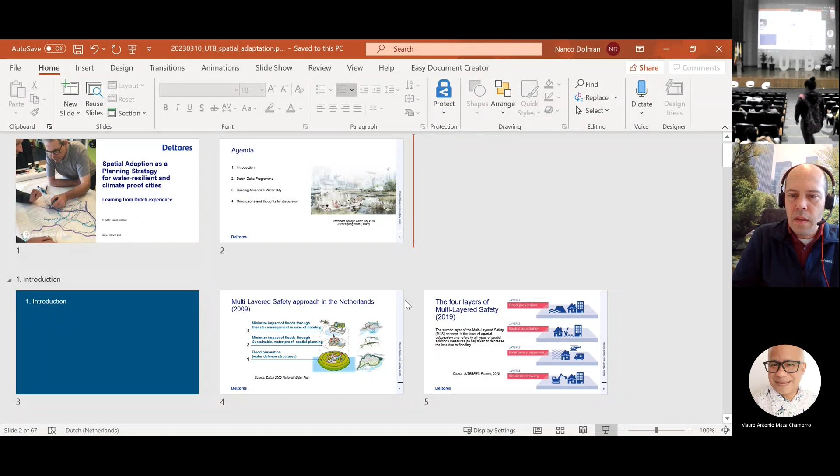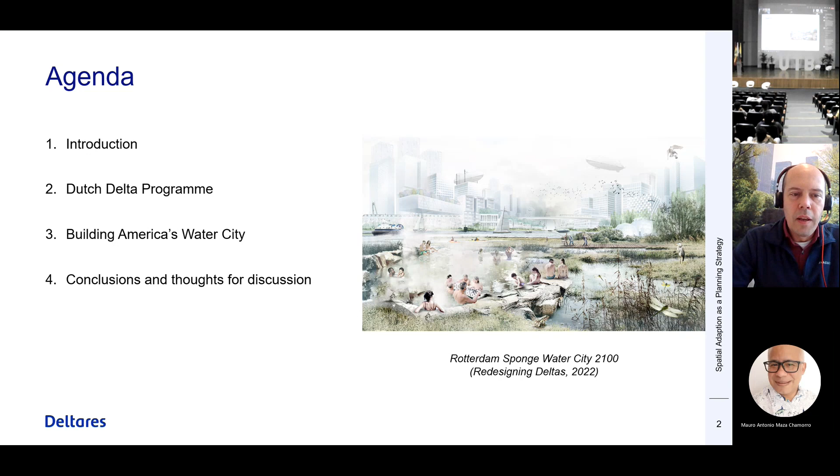Thank you very much. I will share my screen. So for my presentation, I brought a selection of slides with this agenda. I will start with an introduction or context, then share some experience from the Netherlands, especially the Dutch Delta program. Then some case studies from the USA, one in New Orleans, one in New York. And then I will close off with some conclusions and thoughts for discussion.

To start with the introduction, in the Netherlands we have a tradition in flood defenses, building dikes. A large part of our country is below sea level. And we have had to re-evaluate this flood protection because we cannot continue with only having dikes, regarding climate change, sea level rise, but also extreme weather events.

So in 2009, the multi-layered safety approach was introduced. Besides flood prevention, that also includes spatial adaptation in the second layer behind the dikes. So that is having resilient cities, but also our land use. We have to decide on that which fits coping with extreme weather events, but also will foster livability. And then eventually it is also about dealing with calamities and responses to disasters.

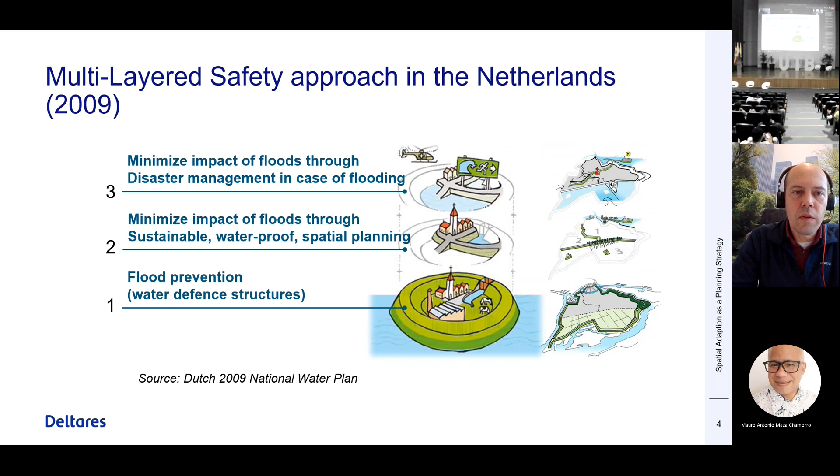More recently, a fourth layer was added, and besides being adaptive, which is rather reactive, it is also about being transformative, more proactive. And that is a little bit following the Sendai framework for disaster risk reduction - so building back better in response to disasters.

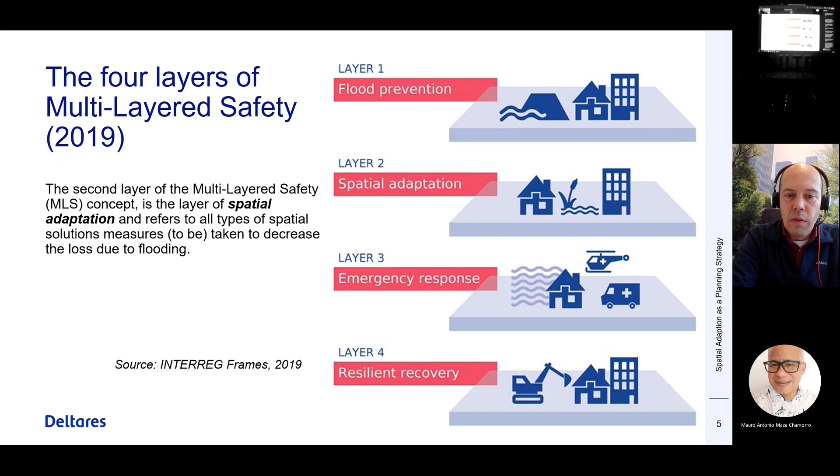What it is also about is living with water. And in a few weeks, the United Nations will organize a world conference on water, and it's really about living with water. It is not only fighting the water, but also the water is bringing life and economic development, so we have to embrace it as well. We can actually benefit from it, like an ecosystem service.

Over almost 25 years ago, we introduced the living with water principles, and that's both quantitative, in retention - delaying the water and only draining or discharging it when necessary - but it's also about water quality, in preventing pollution, then making it in different qualities, and then eventually it also is about water treatment.

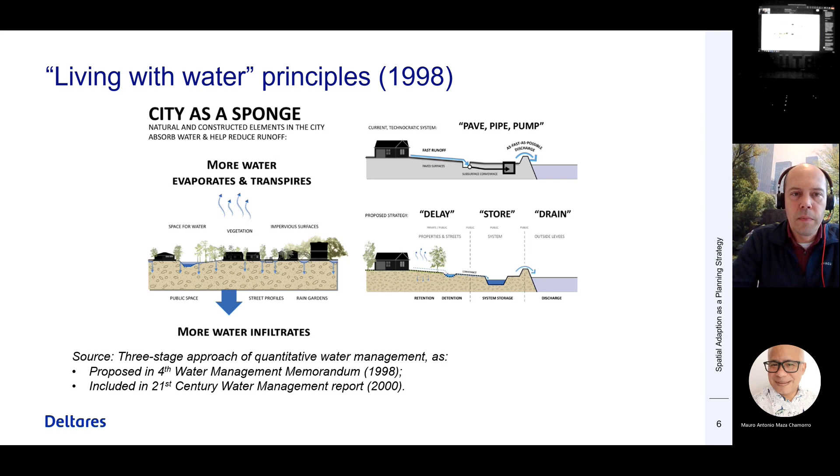Interesting, it is also not only engineering, but it is also about planning, especially when looking at cities and deltas - urbanized deltas. We call that delta urbanism. And designers really like to introduce or analyze the landscape in what we call layers. In those layers, we have the substratum, that's the subsurface. We have networks like drainage, but also roads, rail, canals, rivers. And we have the occupation, the land use.

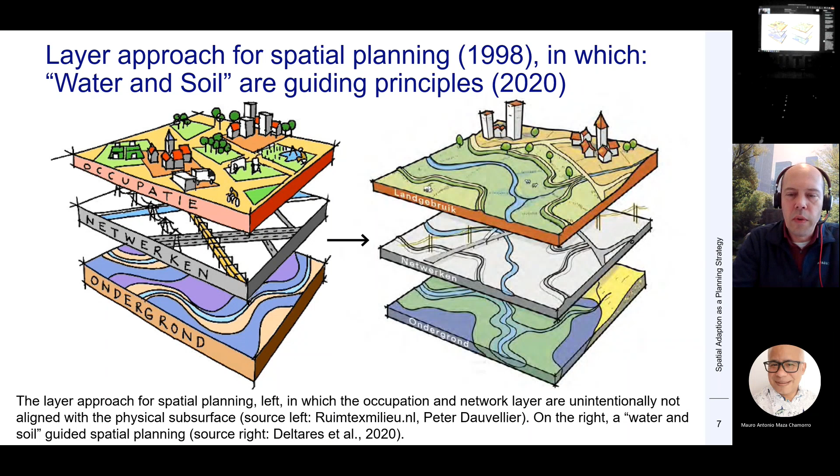And what we see is that water in different sorts, but also the soil, is in all those layers. So you could consider those as guiding principles, what we call them. We can actually integrate that when looking at water and climate change, and then integrate it in a multifunctional strategy. This was actually the design we made for Hoboken, the waterfront at the Hudson River in New York.

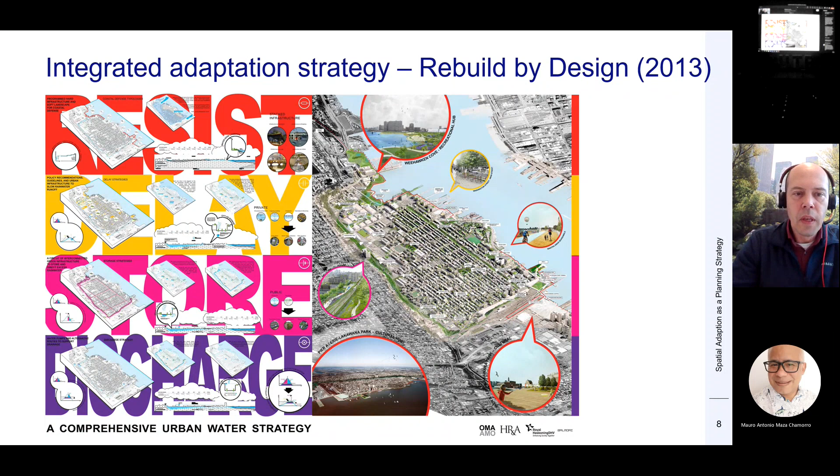The Dutch Delta program actually started in response to a big national flood event. Almost 2,000 people died in 1953, and it was called the Delta Works, which was really about making shorter lines of defense, flood defenses with barriers and dikes, building the threshold. Then at the end of the 20th century, there were several years of river flooding, fluvial flooding, and then the program Room for the River was introduced. We called that the second Delta Works.

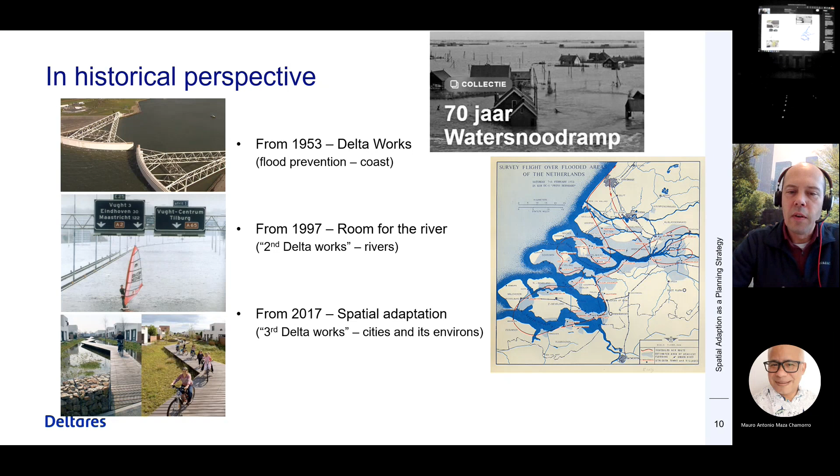And more recently, spatial adaptation was introduced, like a sort of third Delta Works, more focusing on cities and its environments. The spatial adaptation is a Delta plan within the Delta program. So the program is, let's say, like the policy or the national government policy.

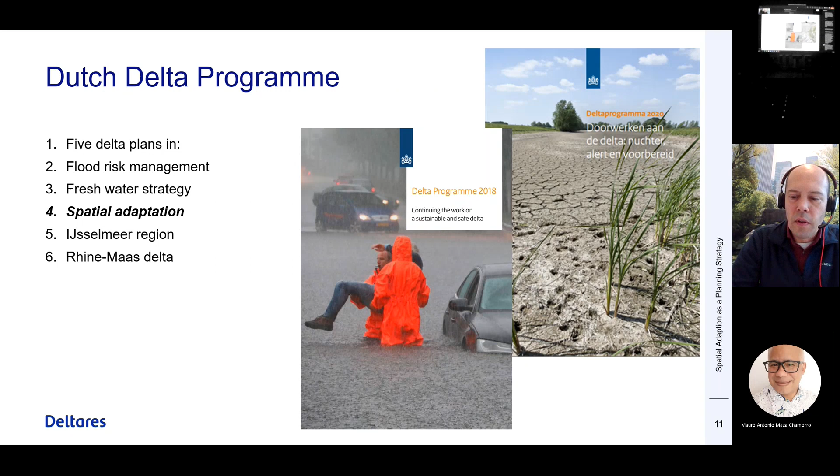And the plan is more the execution of how regional and local institutions will implement it. And of course, also the Netherlands is experiencing climate change. So, because we are partly below sea level, we have very much focus on sea level rise, but also we have experience in increase of precipitation intensity, river discharge, but also dry periods and heat stress.

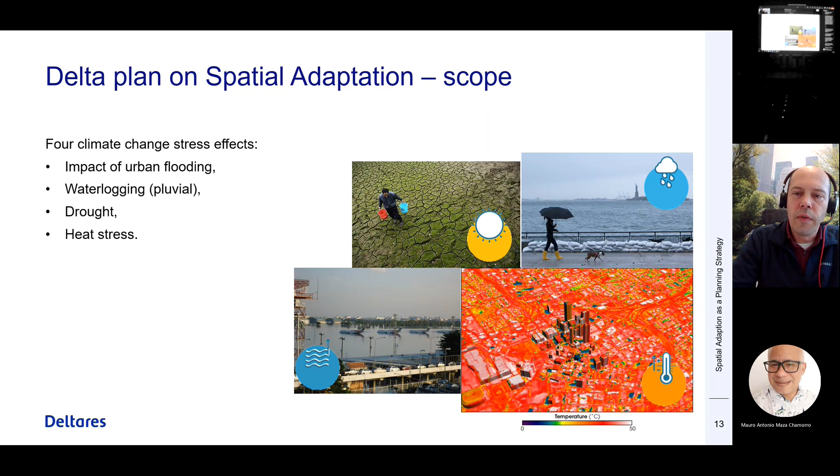And these are also the climate stressors where spatial adaptation is focusing on. So it is about impact of urban flooding, also because of high water levels in rivers, but also along the coast. It's about pluvial, so rain intensity. It's about drought, longer periods of water deficit, and heat stress.

And it follows a triple A approach, what we use within the spatial adaptation process with stakeholders. So first, we want to understand the system, both the water system and the landscape. We call that the analysis. And it's both the vulnerabilities, but also opportunities. So where are synergies to be found? And in the second stage, it is about ambition. It's developing a strategy for a city or a region.

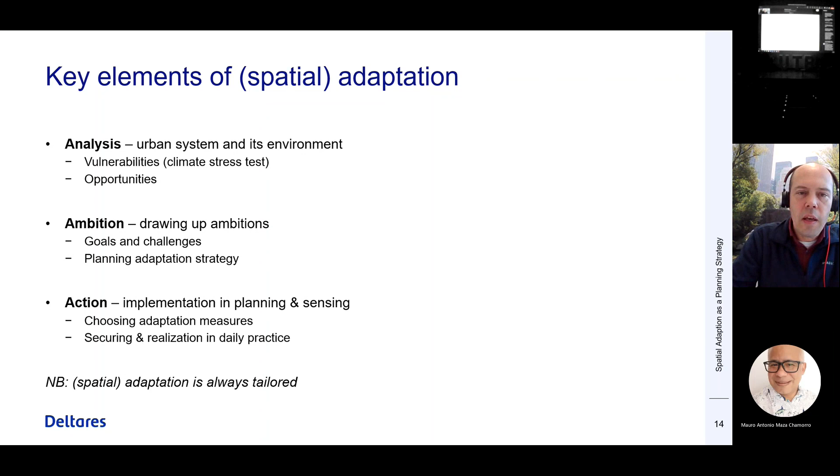And then it's about making that strategy implementable, but also bankable in the sense of financing. And implementable, of course, going to having a selection of actions. And this is always tailored, of course. So this is just a more, let's say, governance approach. And tailored for the Netherlands, we introduced some ambitions, but also goals for the Netherlands.

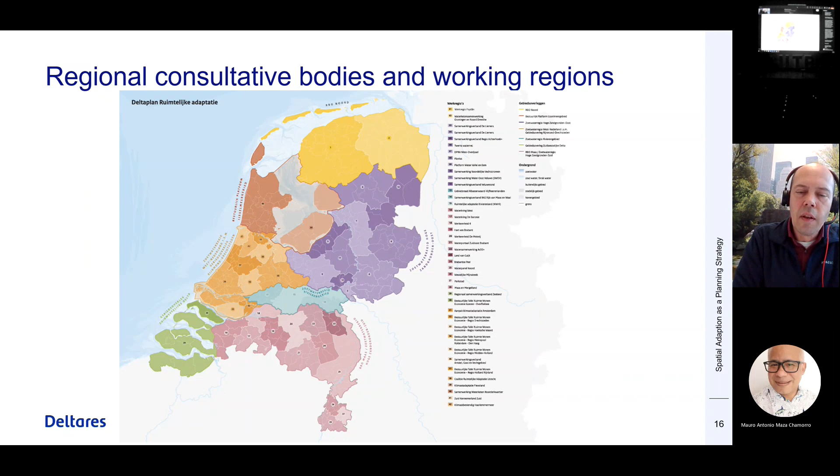So one is that we expect from all stakeholders that they will embed climate-proof and water-resilient action in their policies and behavior. And then we have to work on a transition to a climate-proof and water-resilient spatial design by 2050. And to organize that, the Netherlands is divided in regions, consultative bodies and working regions that will pick up or implement those actions. And of course, it comes with a planning.

Now and then we evaluate where we are, and we are also experiencing that the implementation is slow, and at the same time climate change doesn't wait and is accelerating. So in a way it feels a little bit that we are behind.

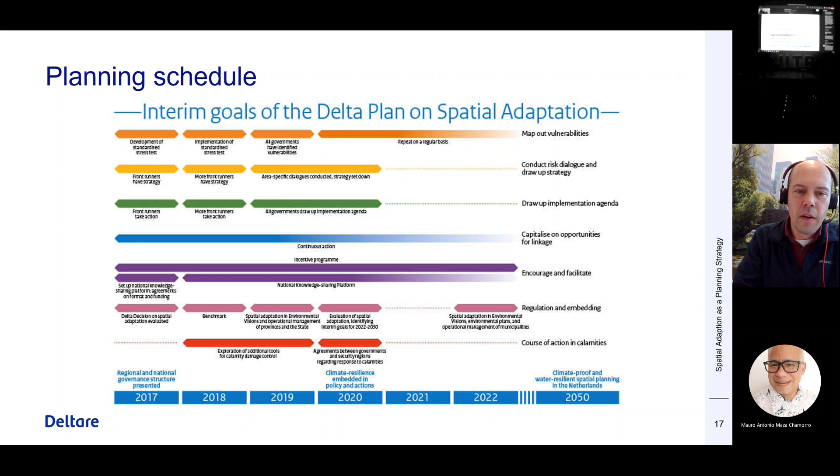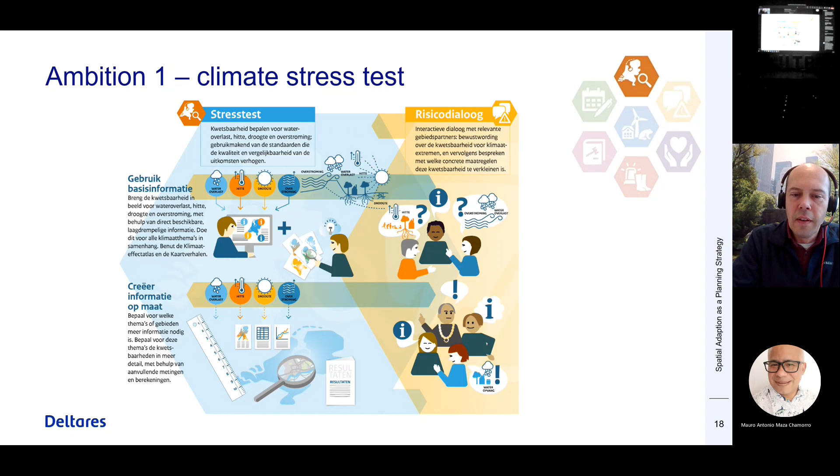To support all this process, we are developing instruments, like for the first ambition, the analysis, understanding the system. We developed a climate stress test, so you can actually map rainfall intensities and floodings. You can see drought stress, etc. And this is an example of those maps. So you have the waterlogging in cities, but also the urban flooding when a dike breach is happening.

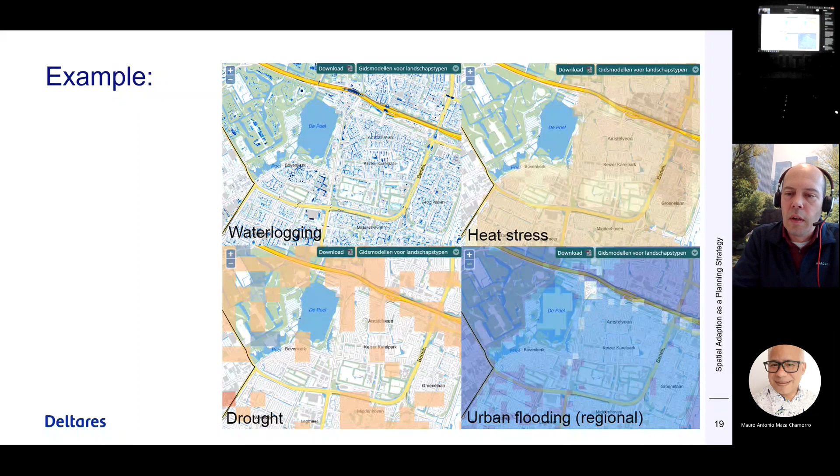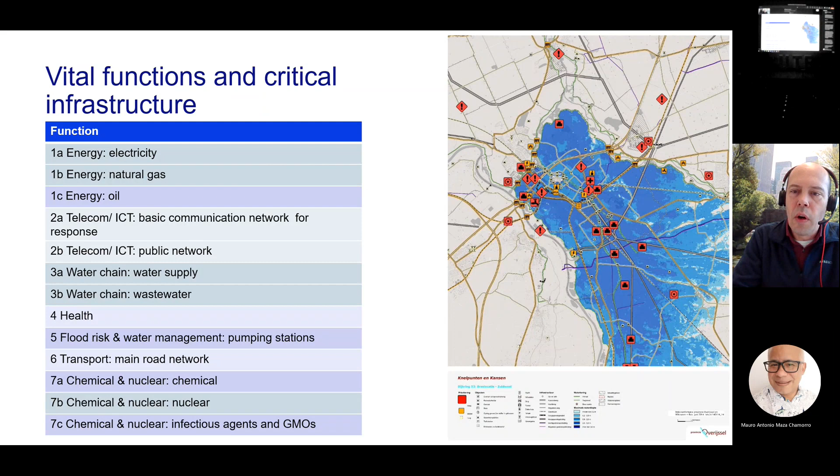It is also about understanding the vital and critical functions in infrastructure, like communication, energy. It is about roads and connectivity. It is also about the multi-stakeholder process and to have a dialogue on this. And interestingly, this is also what we used in New Orleans in the USA. That was called the Dutch Dialogues, to talk with all the stakeholders, but then in a structured way.

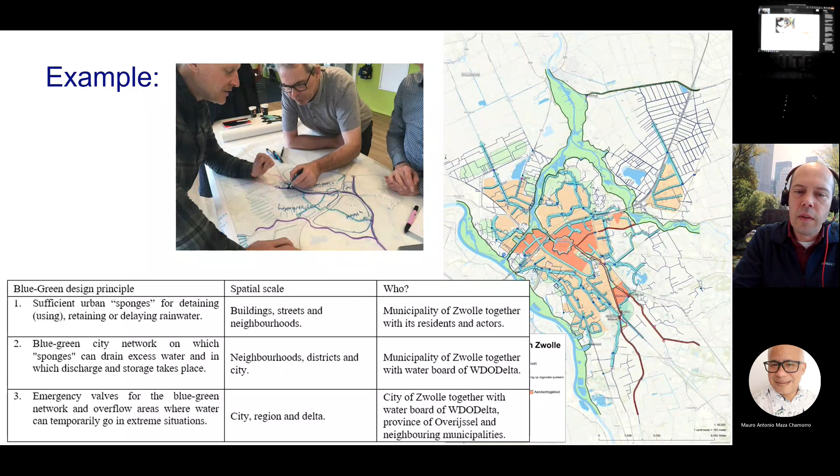And of course, developing that strategy and then finding this common ground to have, let's say, a co-owned strategy. And this is an example from the city of Zwolle in the Netherlands, where we reckoned that there are three spatial scales. So we have the neighborhood scale, a city-wide scale, and a region scale. And for each of those scales, you have to organize with different stakeholders and also with different interests.

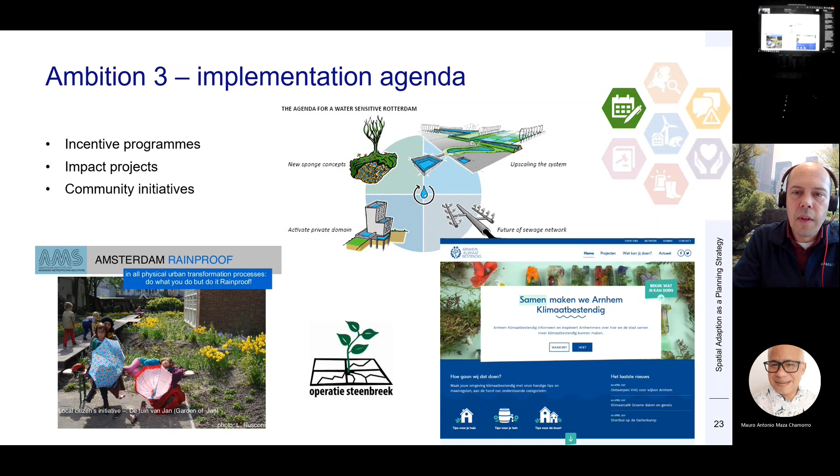And then, of course, it is about implementation. And currently, we still are in the phase of having impact projects or demonstration projects. It's about community initiatives, because a large part of cities is privately owned. It's about startup organized incentive programs.

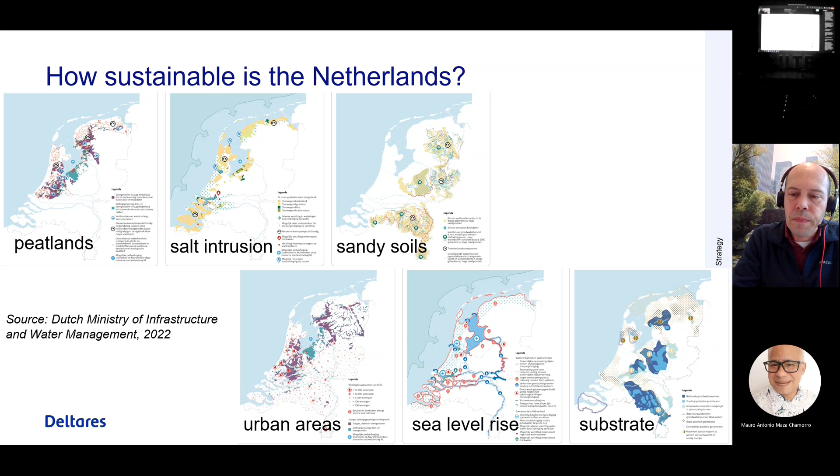And we are working on these futuristic visions in 100 years. So what will the Netherlands look like in 2120, for instance? Does the Netherlands retreat, and then we will live on the higher areas, maybe even in the neighboring countries like Belgium or Germany? Or do we move towards the sea and build new islands or new dunes?

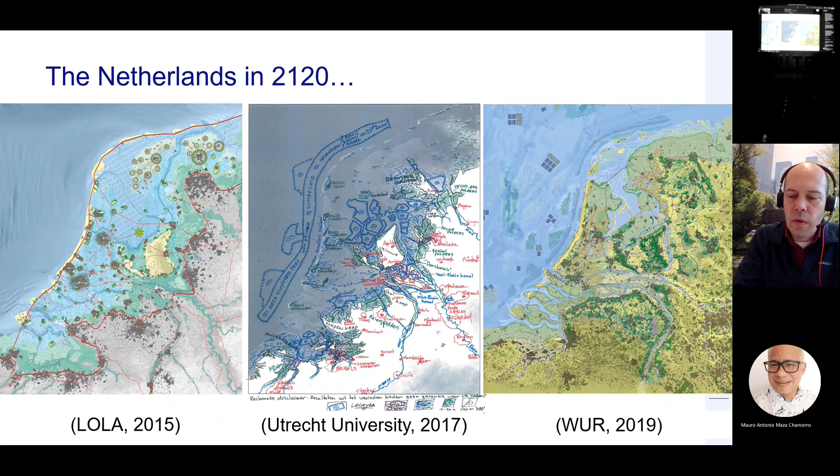Or will we remain and continue strengthening the dikes, but then maybe embrace more or give more room for green and blue solutions? Within this background,

I have worked in the USA, and it was mostly in response to catastrophic disasters like hurricanes. New Orleans was hit by Hurricane Katrina in 2005 and was followed by what we call the Dutch Dialogues, because at that moment the first reaction was to build back all the flood defenses and introduce new barriers, but there was no attention at all to the city itself within the interior of the flood defense.

So we worked on what we called the Greater New Orleans Water Management Strategy that was actually awarded a National Planning Excellence Award. And then in 2012, the area around New York and New Jersey was hit by the storm and Hurricane Sandy that initiated the Rebuild by Design competition.

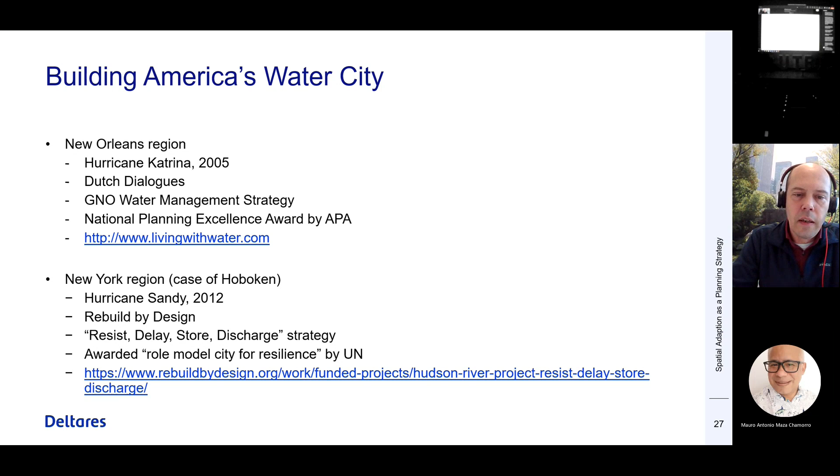It was a competition, but it started as a sort of multi or transdisciplinary way of working, what we already did in New Orleans, but then more formal. And I was in the team for Hoboken to work on the resist, delay, store, discharge strategy. And it was also awarded by the United Nations for a role model city strategy. And this was actually the sort of initiative that eventually evolved to what we now know as Water as Leverage. It also started in Cartagena at this moment.

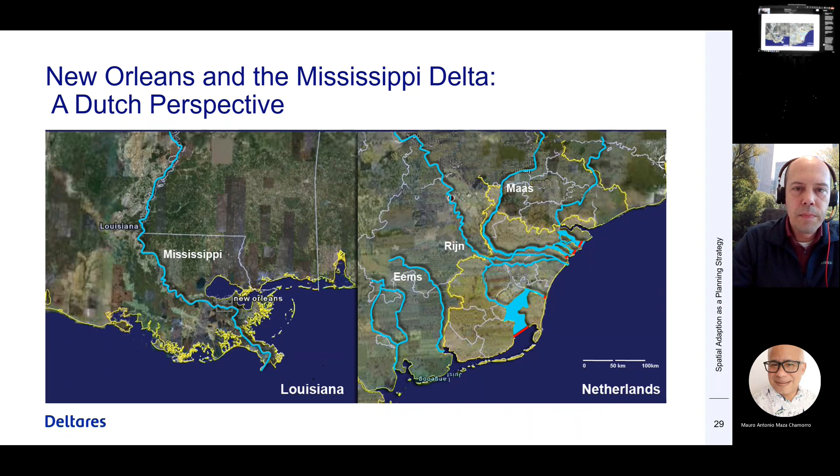There was a whole coalition, many institutions like education, research, practitioners, engineers, both in the US and the Netherlands, working together in developing this water management strategy. At that time, I was with Royal Haskoning, still without DHV.

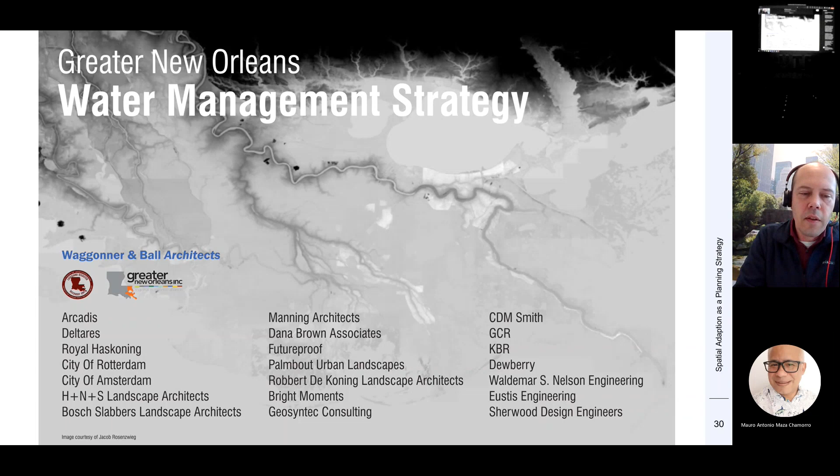And interesting is that we looked first, of course, at how Katrina really illustrated the vulnerability of a delta city in New Orleans, and that the protection system, the dikes and the levees, was designed to cope with a 100-year storm. And that was already done or underway. So our focus within the water management strategy was more to deal with subsidence, with extreme rainfall, making better places, livelihood, like blue-green in the city, and eventually make that a more livable city, also for the next 100 years or beyond.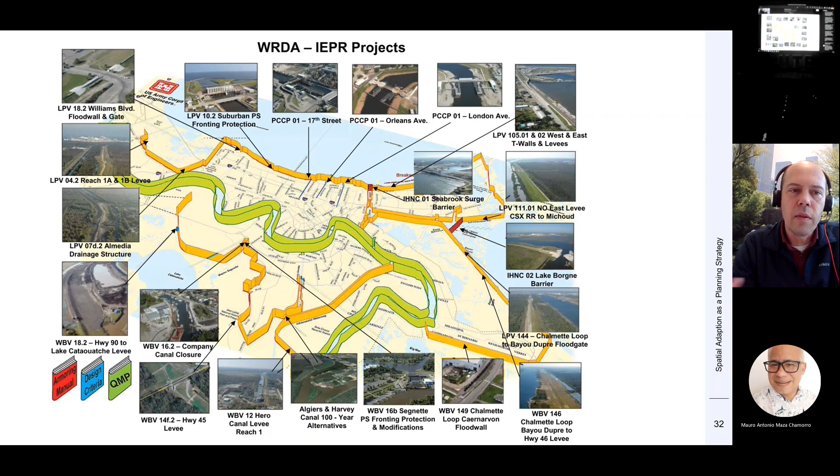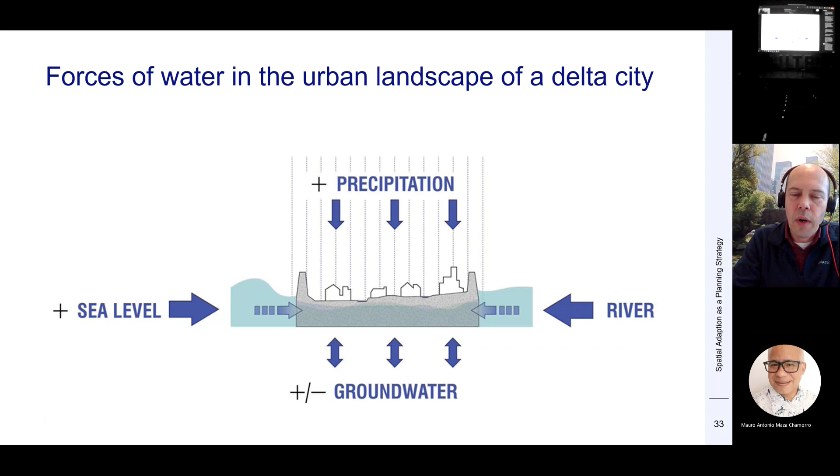And we looked at the city more. Okay, the water is coming from different sides. We have the sea because of the Gulf of Mexico. We have the river, the Mississippi. We have precipitation from the sky, and we have the soil and groundwater from below. And this is the daily practice. So it is not only hurricanes. On a yearly basis, extreme rainfall is happening in New Orleans, especially during the wet season.

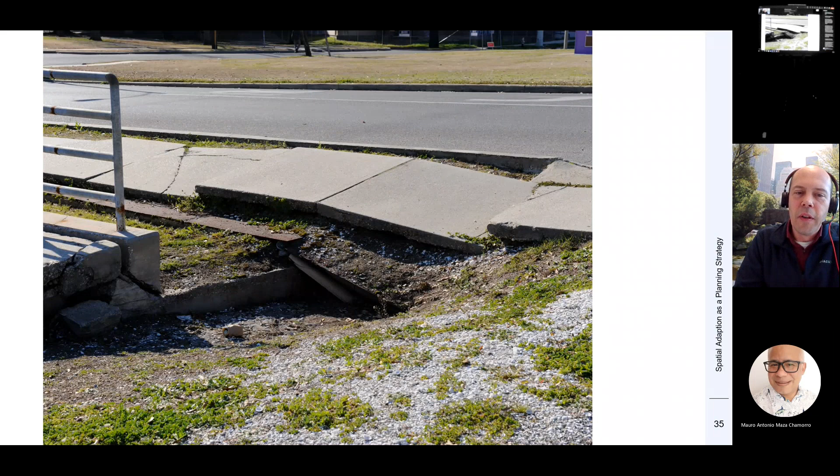This is also happening during the dry season, because the water management was very much focused on discharging the water. So there's no water left to keep the soil moist and wet, and to avoid damage to constructions during subsidence.

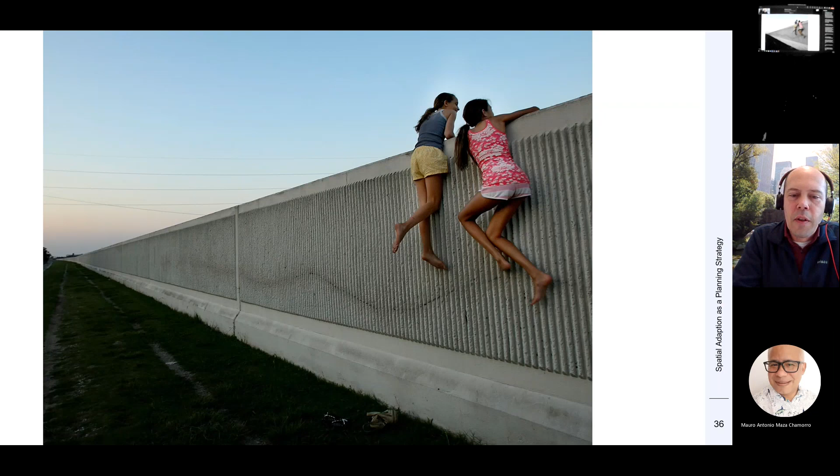And this is what the relation was of society and the city with its water system. The water system is either covered up or buried below the city, or it is behind the wall, like this. This is actually one of the outfall canals you cannot see. There's no relation at all, although it is a water city. It used to be in history.

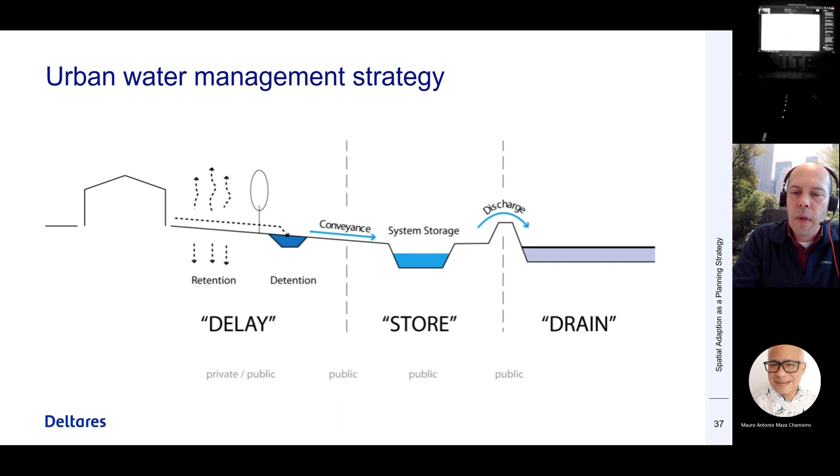So we introduced the living with water principles for the delay, store, and drain approach, to see where we can have interventions like retention, detention, recycling, or reuse. Then store the water in the system, maybe in the ground, or recharge it to limit subsidence, and then only discharge it when necessary. And I was part of the water system analysis, and I did quite some calculations on the water balance, and we calculated what we called the water assignment, which was actually for water storage.

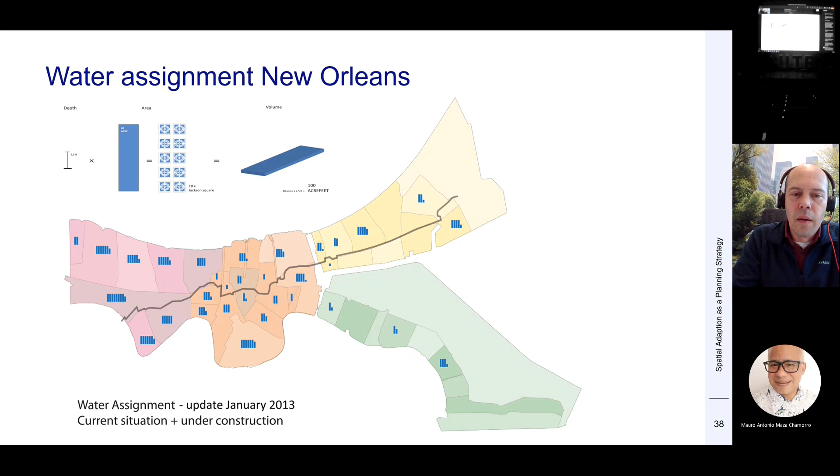And this is a visual that shows you how much on scale extra water, so additional water storage, has to be implemented. And also wanted to show this approach where the calculations link with the urban design. So that is on the bottom right, the urban typologies.

And that is what the urban designers do and the landscape architects, to look at cities and how the cities have a certain use, like historical city center, dwelling areas, industrial areas. They all have a different sealed surface, but also another use. They have another vulnerability to water extremes, and they will have different solutions like the ecosystem services or nature-based solutions. And then, of course, we can calculate those, what the effect is, and that links to the water system in its partly constructed and partly in a natural way.

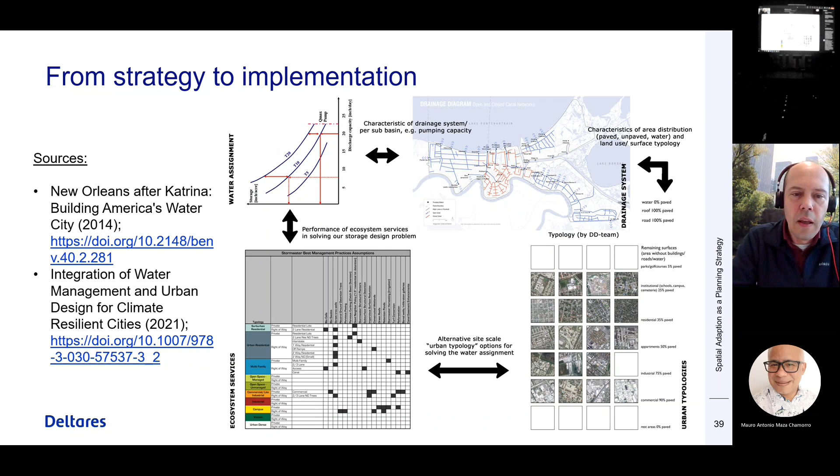And eventually we came up with a proposal for the Greater New Orleans Urban Water Plan. And it was 10 years ago. And the follow-up was that there in the district of Gentilly, so the Gentilly neighborhood, there was a resilience pilot project, was funded $100 million. And we started with one rain garden. Today we have over 200 rain gardens in that neighborhood.

And recently we still do measurements, monitoring on those, because we really want to know what the effect is of introducing all this blue, green, and nature-based solutions in the city, and to motivate, of course, the investments of this area.

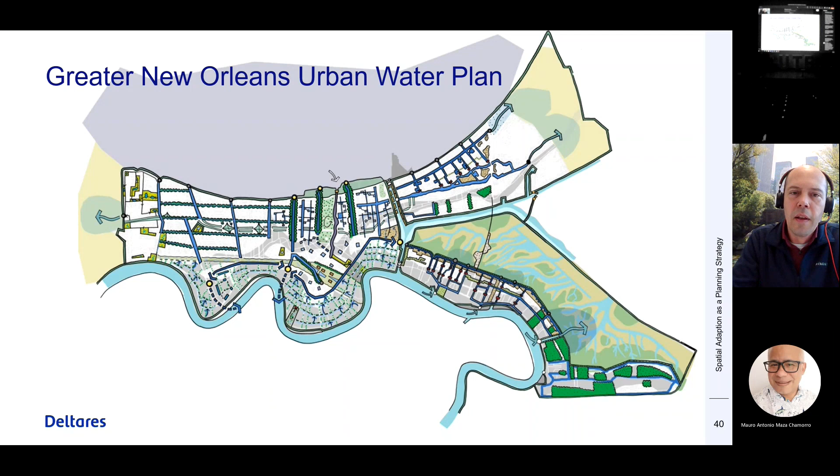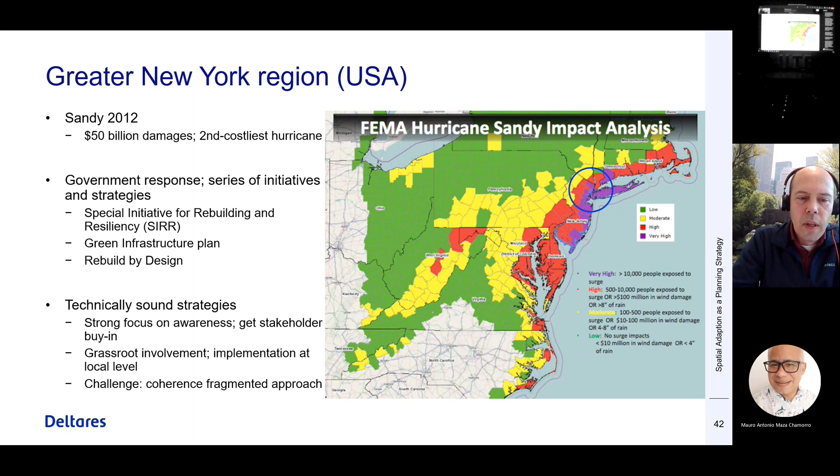There was also already work on what we call the Green Infrastructure Plan, and there was this initiative Rebuild by Design as a competition to, let's say, collect ideas and suggestions for rebuilding this area. Yeah, and there were already some technically sound strategies, although there were still barriers. And so how could we organize these strategies in stakeholder involvement and having a buy-in? What is in it for me? It is also about the financial aspect, because it was still very fragmented.

Interesting was that this was a completely different response than after Hurricane Katrina in New Orleans, because it was not reacting, okay, we have to rebuild the levees or the flood defenses, but this was seen as an opportunity to combine it with green infrastructure and also to have multifunctional infrastructure in urban areas. And the then mayor of New York, he said a flood wall doesn't have to be just a wall, it can also be an elevated park or boardwalk and still block the floodwaters.

And it was also about introducing things like urban livability, livelihoods. And that was, I think, really a game changer. So I think what cost the Dutch maybe over a century, in the US it only took a decade to understand that, from, let's say, a technical approach to a more integrated, multifunctional, transdisciplinary approach.

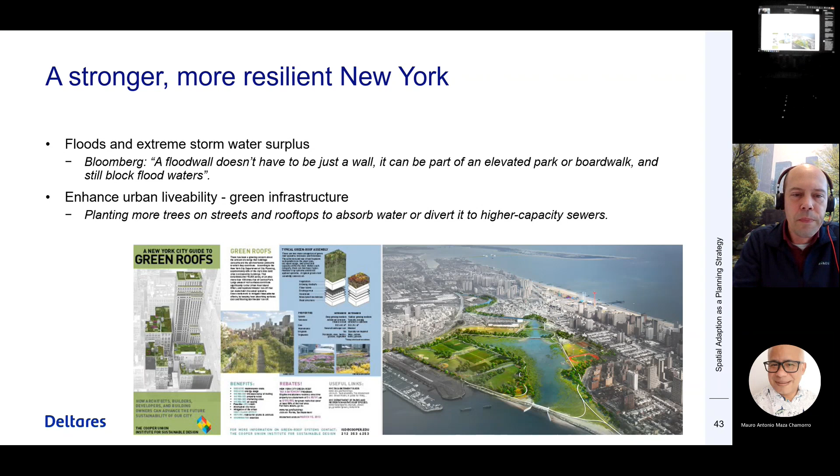So, yeah, the Rebuild by Design, actually, it was a sort of pre-Water as Leverage competition. It was especially focused on design, urban design, but then still had to, let's say, motivate and come with a suggestion for funding, and that it has to be bankable and fundable.

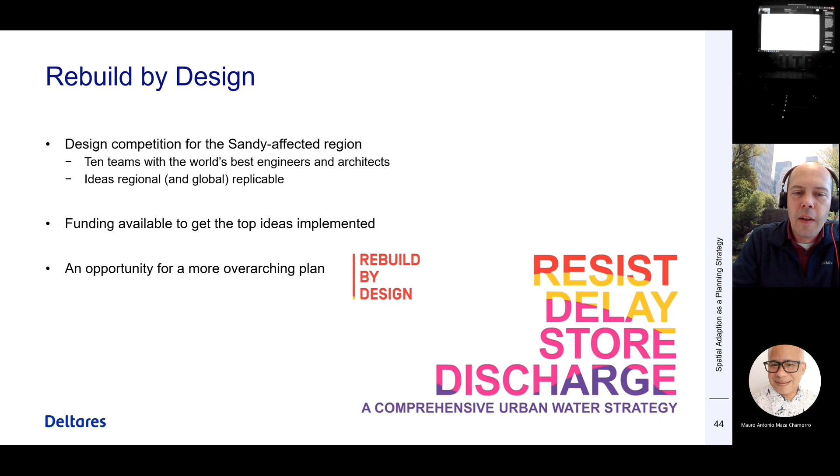And it was also an opportunity for a more overarching plan because it collected, of course, many ideas, but then, of course, also the common objective. I was part of the team OMA, the Office of Metropolitan Architecture, based in Manhattan. And we were focusing on the city of Hoboken, opposite of New York City, at the same river, the Hudson River, but then in a different state, New Jersey.

And why we focused on Hoboken was that this was smaller than, of course, New York City. And it has to demonstrate a strategy. So we had less stakeholders to involve and less area, and it was also very much affected.

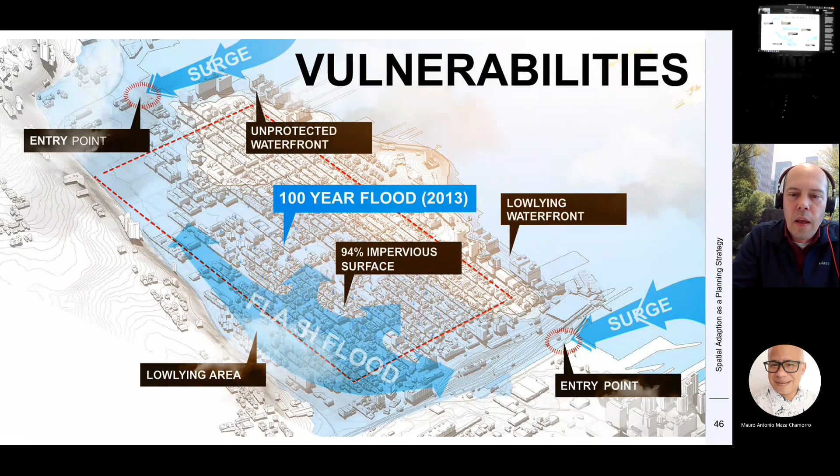And there's also no room for even having green or a relation with water, although this was the flooding. And there was also an understanding that it is not about protecting utilities or, let's say, buildings or infrastructure on a local scale. It is about a community-broad protection. Together, we have to make a combined, let's say, whole community approach rather than protecting only the building.

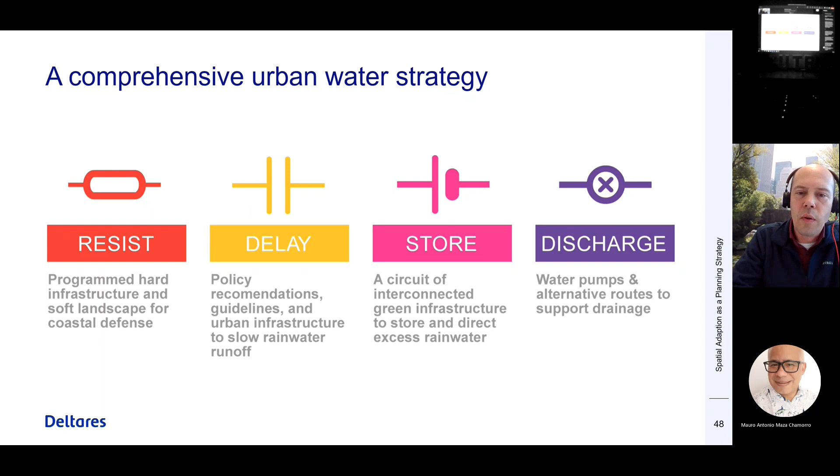We actually came up with a sort of second version of the New Orleans strategy. In New Orleans, we focused on the delay, store, and drain strategy. And we combined this with the resist. So that would be, let's say, the storm surge protection, the threshold. And of course, in between, there is the engagement with community and stakeholders, including finance as well.

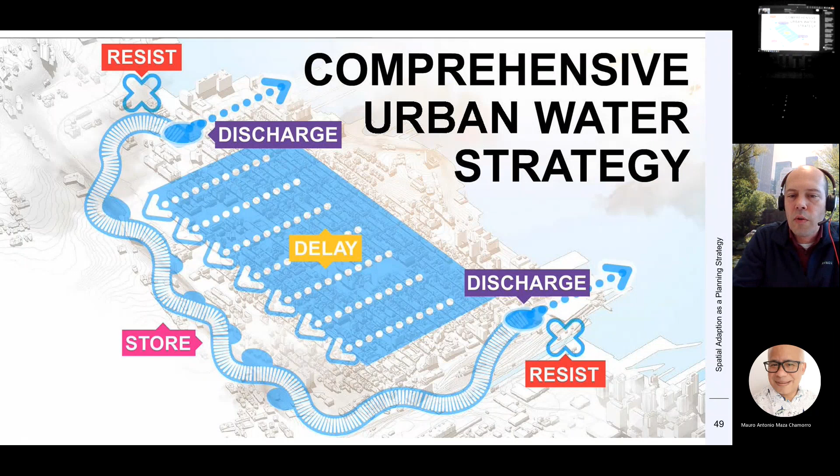And this was a sort of illustration of the whole idea to have resist at the locations of the entry points, the low-lying waterfront, combined with a discharge point, delay in the whole city, and then a major storage that is a multifunctional or a sort of blue-green belt behind the city.

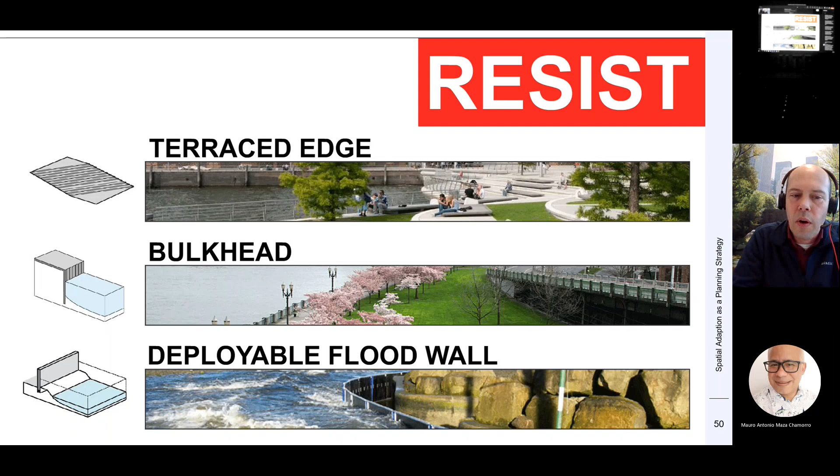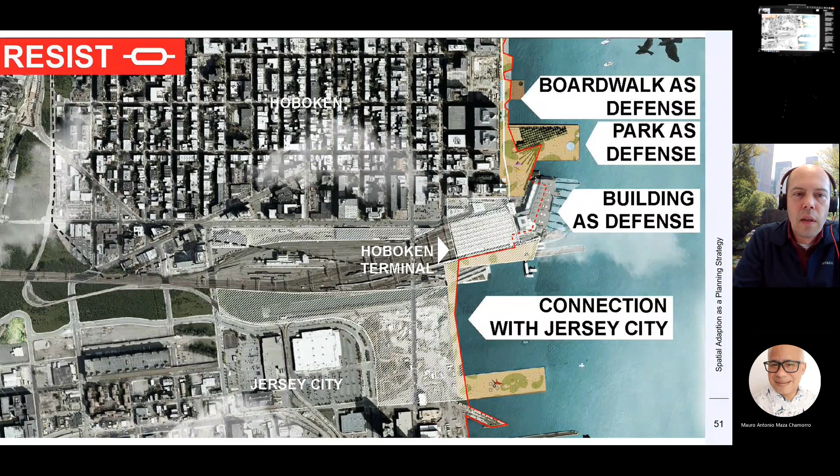So for the resist, we looked at multifunctionality. So it could be like an elevated park, or maybe a flexible flood wall, maybe a multifunctional waterfront, like this, next to the train station, and also the ferry station opposite of Manhattan. So there's just some pictures of that. And actually, it included the once per 200 years or even maybe 500 years flood event.

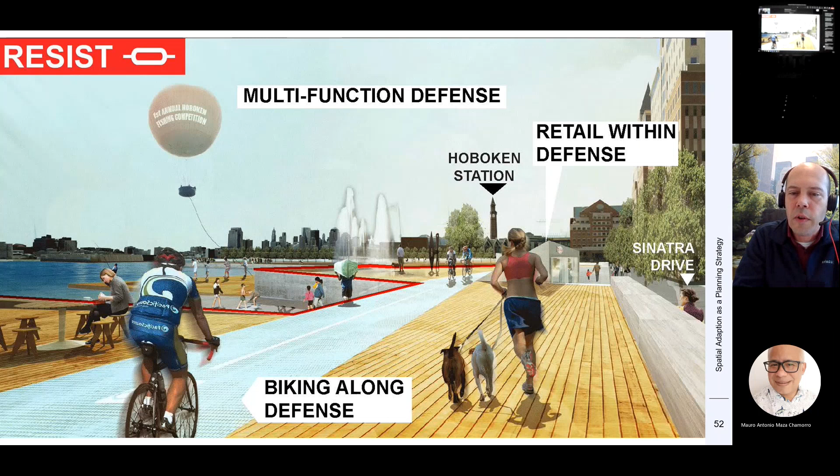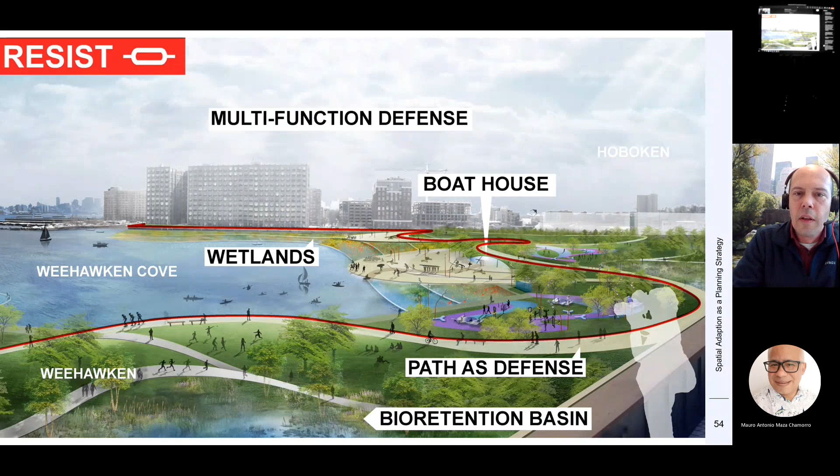And to the north, the raised park, and also combined with a wetland, a sort of treatment for water quality as well, and with bioretention basins. And then in the city, the delay measures that could be like water parks, rain gardens, bioswales, green roofs.

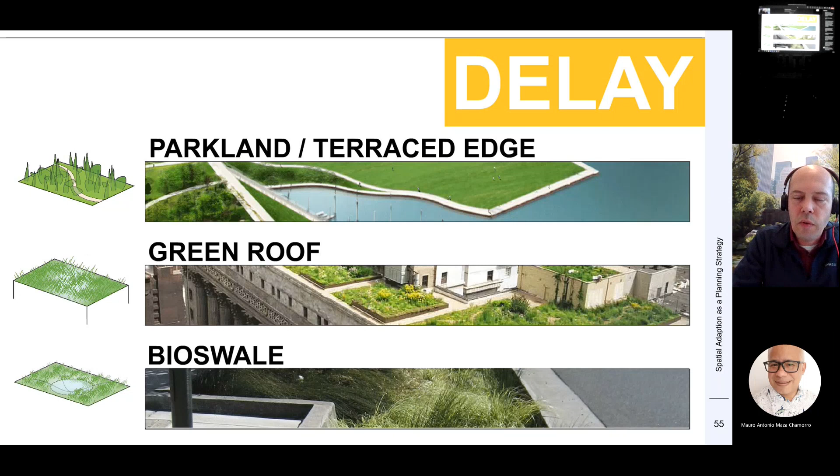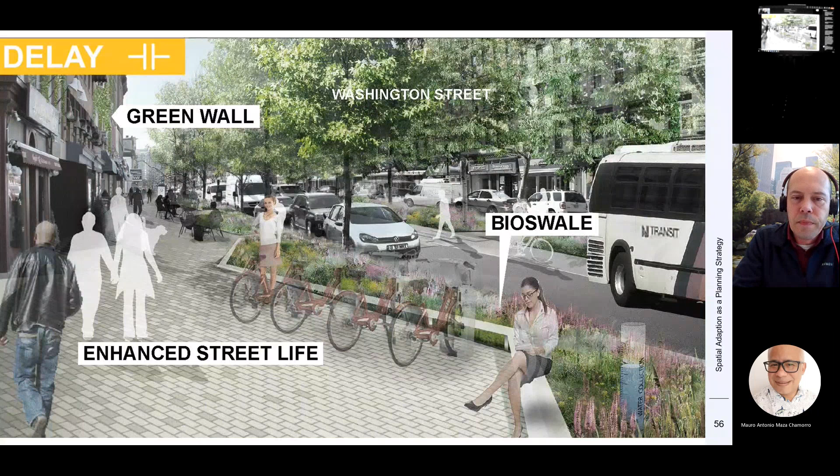And this was one of the main streets in Hoboken that used to be, or is still, very wide and all with sealed surface, so paved, tarmac. And what we introduced to make it more friendly for people to walk in, having porous paving, having a little bit more green for infiltration or to retain the water. And it is already being implemented right now. And then we need, of course, still a larger intervention, and that is the store part.

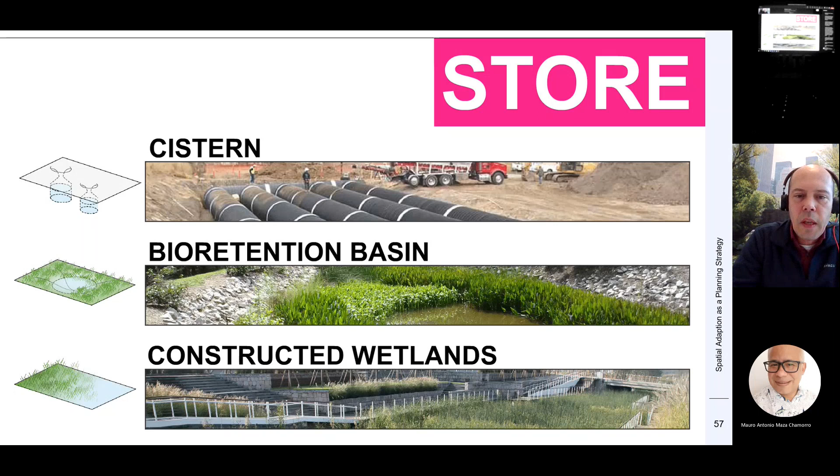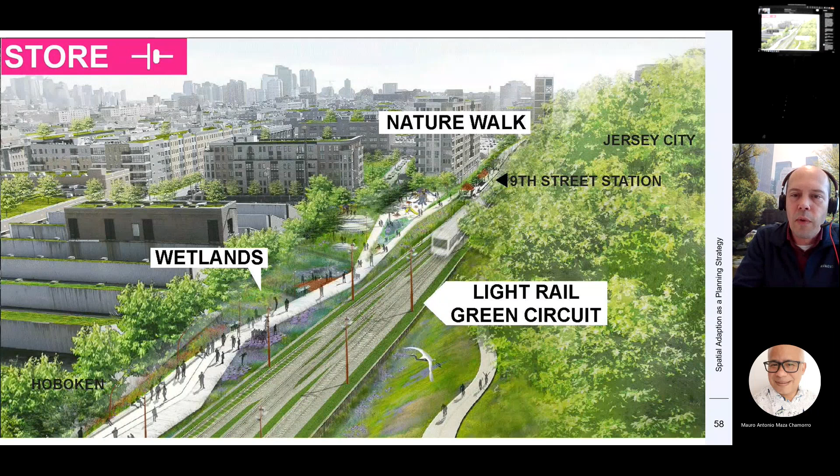And for this, we looked at the light rail connection because it was in the backbone of the city. And we looked at maybe we can combine that with a linear park that also could serve as a blue ribbon during heavy extreme rainfall or rainfall intensity.

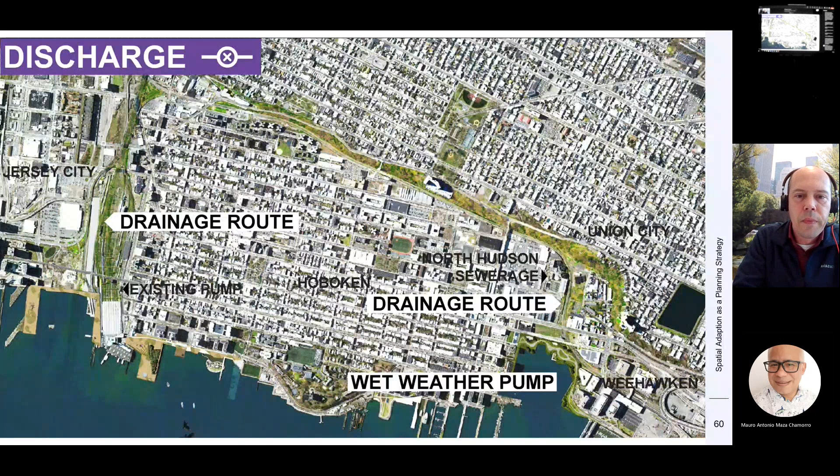And then eventually, sometimes we have to drain water as well. So we need pump stations, especially in the low-lying areas. So we call that the wet weather pumps. And this is the combination of all the components in the city.

And for this, we reached out to the community with stakeholders, and we developed multiple tools to do that, like the Flood Risk 101. We made a simulation, like a sort of game, a serious game. We did a survey with people living or people in transit, working in Hoboken, expositions, and to tell the story and to collect reactions, ideas,

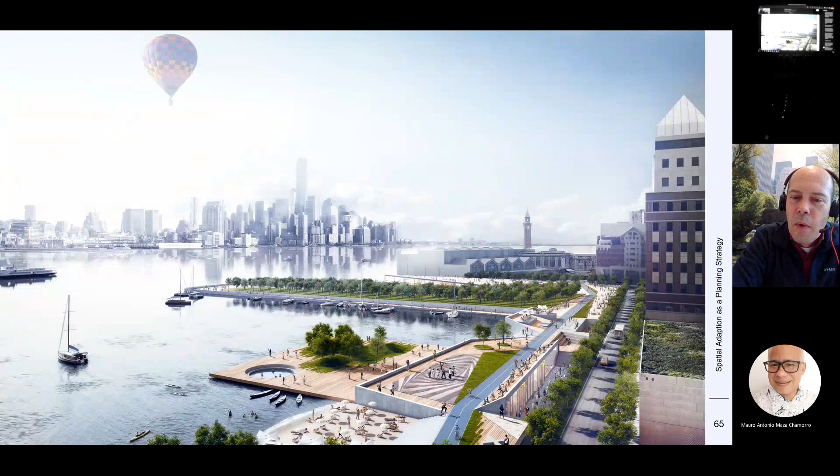engagement, like events, etc. And then collecting a lot of letters of support because this has to be implemented, and we need the support and that everyone is sort of agreeing that this will be the future strategy. And this is, I think, still the most famous render we made, including the once per 500-year flood defense in a multifunctional dike and waterfront.

maybe nature-based solutions. It is also to prioritize some of the challenges, so to sort of find a certain focus, because there are so many challenges going on also in the transition, like sustainability, circular energy. And then throughout the interventions, and that is what we still do in New Orleans, for example, is evaluate effectiveness. So see, do the interventions work? Do they have an impact on the bigger goal or an ambition?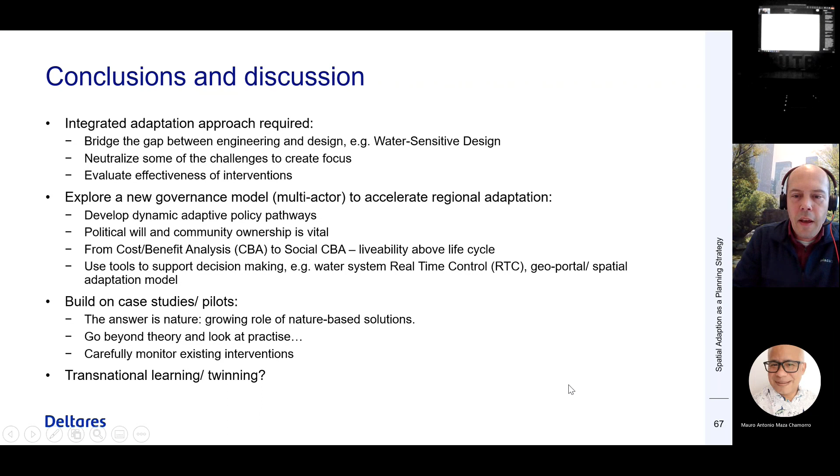Perhaps there are questions, or still, sí, time for some discussion. Sí, gracias.

Gracias por su atención todos a la presentación de Nanco. So now we are going to have some questions, Nanco, from the public. Is that okay with you?

Yes, I'm okay. I will translate the question and then I will try to do a summary of your answer, if you think that's okay.